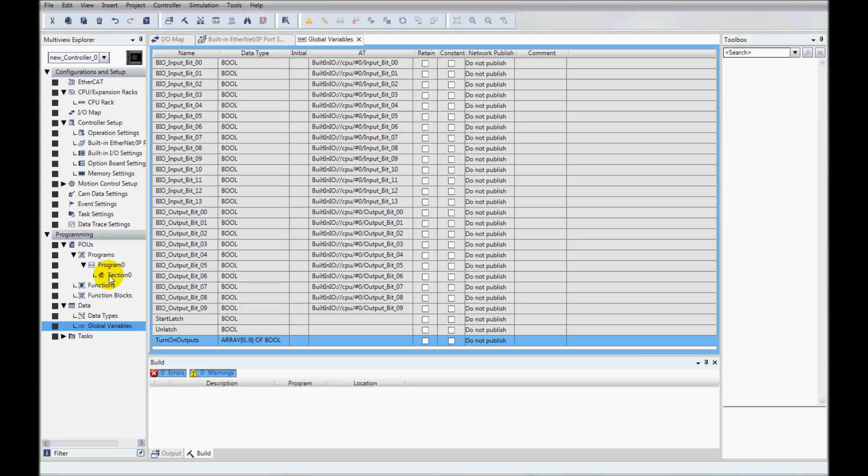And insert again, and this time I'm going to put in turn on outputs, and instead of a bool or an individual bit, I'm going to select an array, and it's going to be an array of bools. And I have 10 outputs here, so I'm going to use those 10 outputs, and I'm just going to say from 0 to 9.

I'm now going to go to my program 0 and select section 0, and I'm going to put in a contact here, and I'm going to make that the start latch, and I'll have that go to an output, and the output I'm going to select is the very first output of my controller, which is bit I/O output bit 0.

And I'll put in a normally closed contact and call this one unlatch, and then I'll put in a normally open contact in parallel here, and that will be this bit I/O so that I can latch it, and then I'll add another rung below.

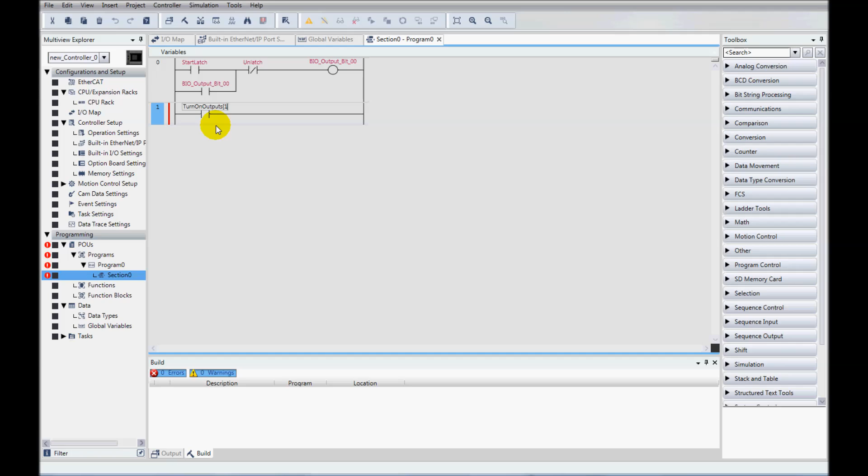I'll type R to add another rung, and I'll add a contact, and here I'm going to select turn on outputs, and I'm going to select array element number 1, and I'm going to have that go to my output, and I'm going to have that go to bit I/O output bit number 1.

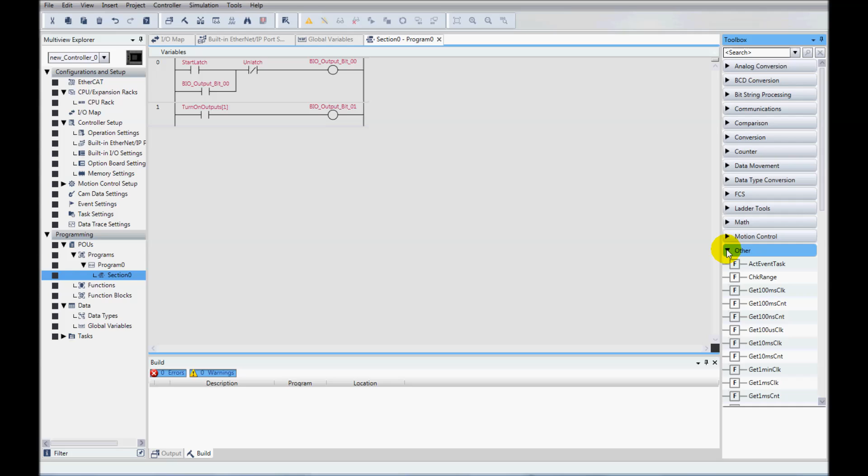Now I want this to flash. When this output is on, I want this output bit to flash, and I'm going to do that by coming over to other, and I'm going to select a 1-second clock pulse. So I'll come over and grab a 1-second clock pulse and put that in here.

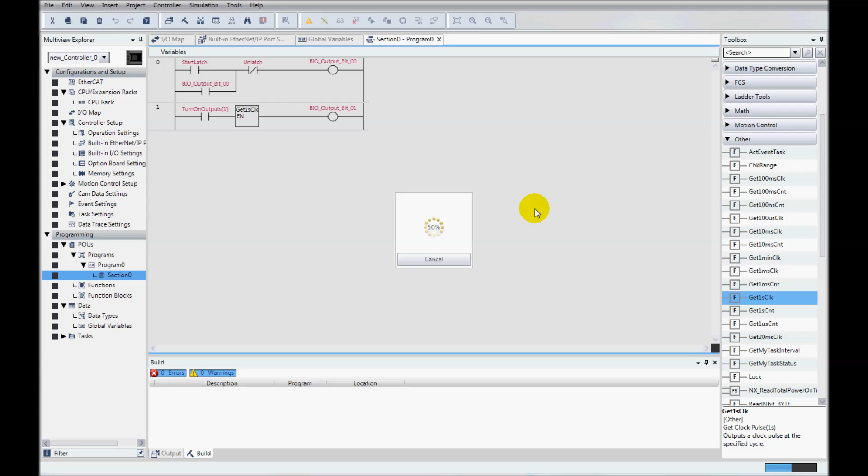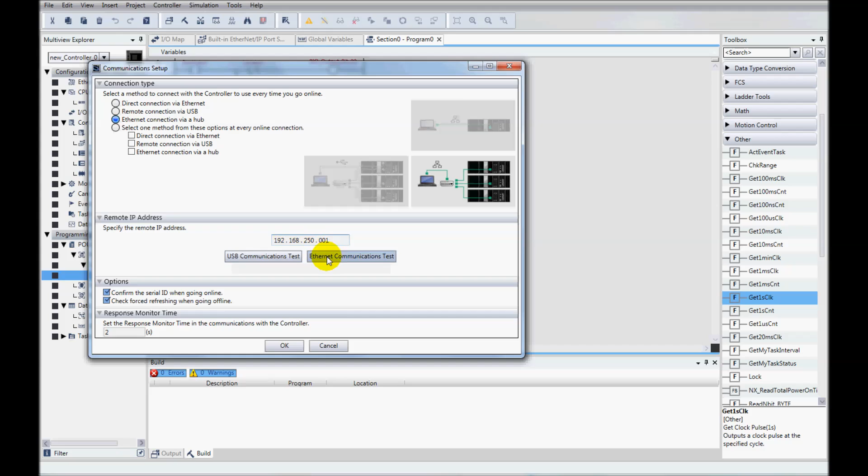I'm now ready to rebuild my controller just to verify that everything is good, and I rebuild it. And now I'll go to controller communications setup, and I've got a hub here, and I'll type in the IP address of my controller, 192.168.250.001. Check my communications, it's okay.

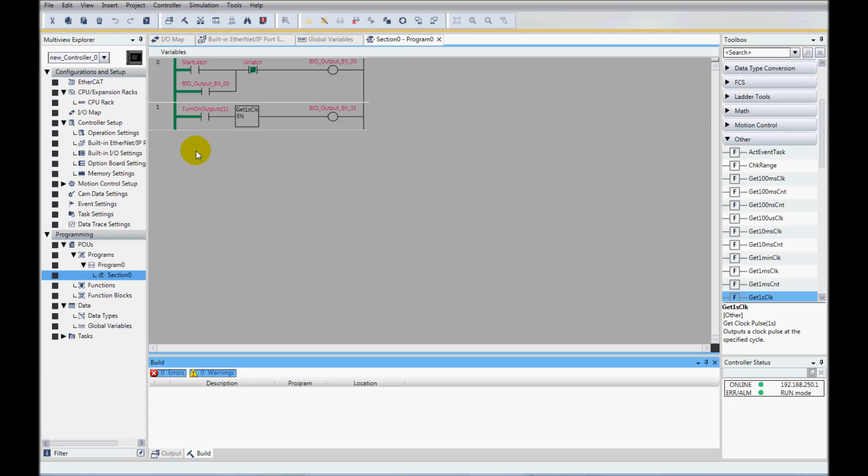Now I'll go online, and now I'll download to the controller. Click yes. And now I can test my program. Come over here and I'll turn on my start latch and turn it off. Notice my output is on. Make this a little bit bigger to see it. And I can come over here and unlatch it.

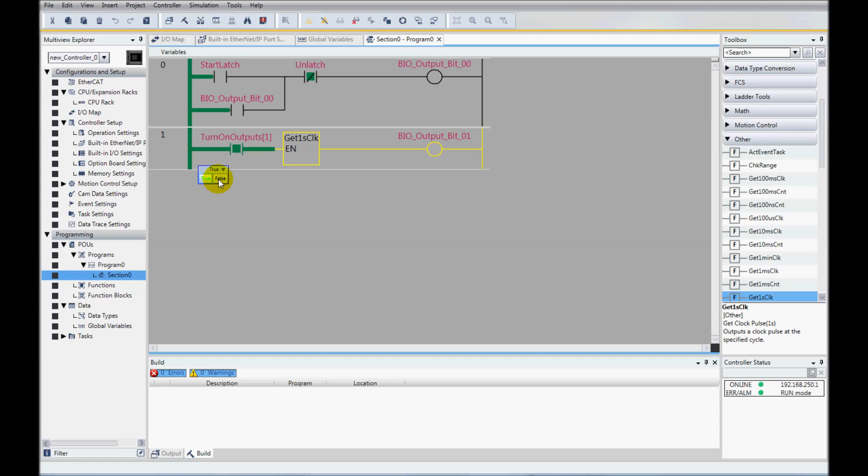And now I'll turn on bit number 1. And you can see that as long as bit number 1 is on, it's going to flash output bit number 1. And that is how to set up and program an NX1P.